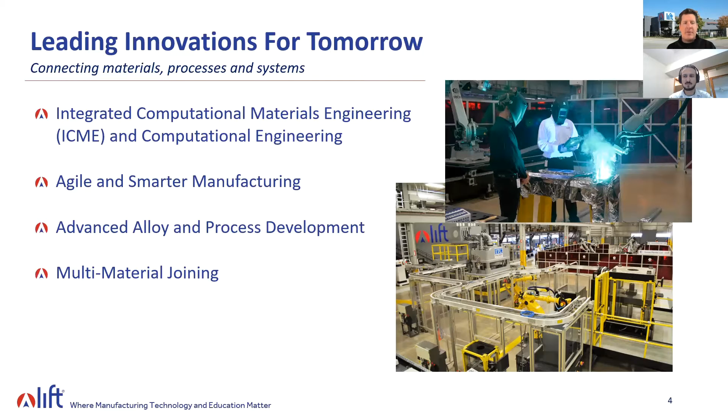On the technology side of the house, leading innovations for tomorrow, again, it's about connecting materials, processes, and systems. You can see our four main pillars of technology that we're working on, all the way from integrated computational materials engineering, the digital side of things, to agile, smarter manufacturing, advanced alloy process development, multi-material joining. As we're developing these advanced alloys and new processes, how are we going to join all of these things together?

A little bit deeper into each of those pillars of technology. I won't quiz you on these, but it shows you the depth and the breadth that we have, not only in our in-house facility in the Corktown neighborhood of Detroit, but around the country with our members and folks like MAHLE. So again, you can learn a little bit more about these on our website, or certainly reach out to us with any questions.

On the talent side of the house, learning innovations for tomorrow. Again, it's still about innovation, but new learning tools, pathways, and venues. We kicked that off with our Ignite Mastering Manufacturing curriculum, which is a 3-year high school curriculum available around the country. We do teach it at our Corktown facility here in Detroit, a 3-year program for high school students really to open their eyes to advanced manufacturing. We host that at the LIFT Learning Lab, but the curriculum is available in about 11 states now.

But the Learning Lab is an immersive lab where students get to come in, and while they're learning about advanced manufacturing, they get to look out the windows and see our technicians, see our ecosystem hard at work, developing some of the new technologies that we just talked about earlier.

And we also offer world-class certification programs on our own at LIFT, but also through a program we call Operation Next, which was developed as a military-focused program to help our men and women in the military before they separate from the service, up to 6 months before they leave, to give them the opportunity to earn the credentials in some of the most in-demand jobs. These are nationally portable, industry-recognized credentials.

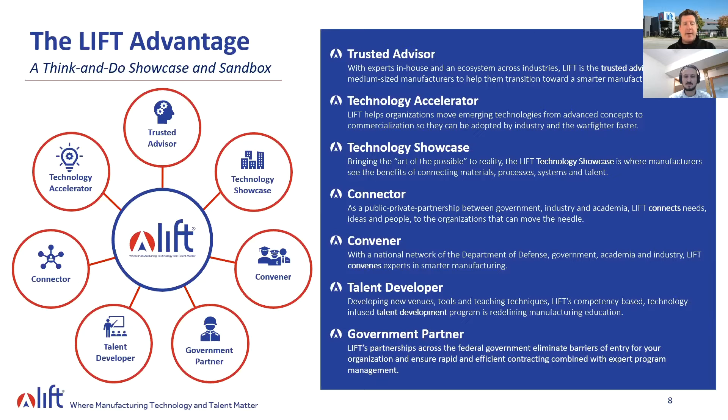In the meantime, you wanted to hear from MAHLE today, so I will hand the presentation over to Ciro, and I'm going to stop sharing my screen so he can share his. Ciro, the show is yours. Thank you very much, Joe. So thanks, LIFT, for having us in that community. We're happy to have joined and to be part of LIFT, and it's an honor to be here and to be in that group. Yeah, thank you.

First of all, maybe a quick introduction. My name is Ciro Vieira. I've been working with MAHLE for the last 17 years with assignments in Brazil, in Germany, and now since 2016 I'm here in the US, and I'm heading the sales and business development function of our MAHLE Industrial Thermal Systems division. So we'll be going through a little bit of MAHLE, and what industrial thermal systems means within the whole MAHLE. So better to go straight to the presentation, and then I can clarify a little bit of the organization here. Okay. Let me move on here.

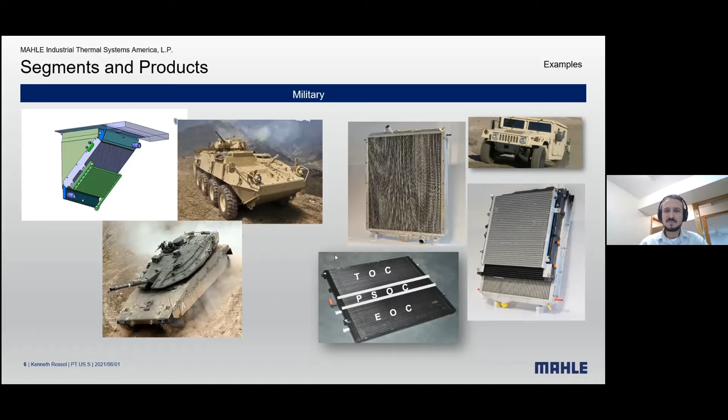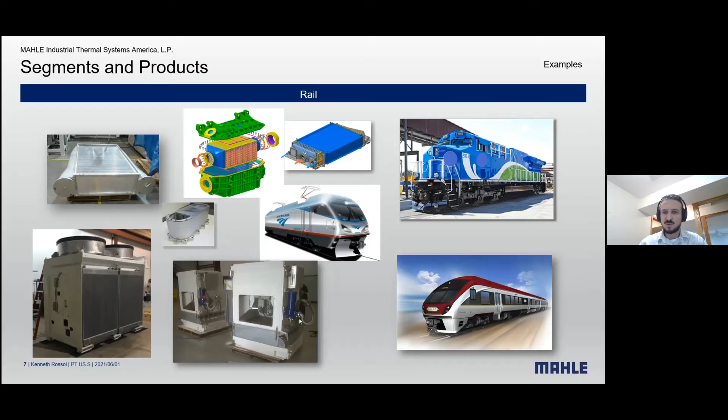Moving on, here is a little bit of what we do for the rail market. These are some examples of charger coolers, three different designs for rail applications, and those are cooling towers for those massive public transportation locomotives. These are really big units, weighing more than I think 7,000 or 8,000 pounds, and probably some 8 feet high. That's used to cool a 4,000 horsepower plus engine on a passenger locomotive. Those are cooling towers for electric driven locomotives as well, also produced here in our Belmont facility.

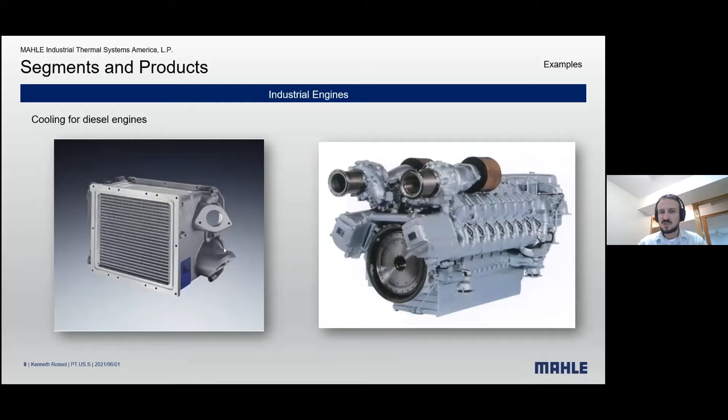So if it goes to lighter applications such as passenger cars, you have a tube and fin technology, which, yeah, I'll probably explain tube and fin first and then get back to bar and plate. It's easier like that. So you have a pre-formed and welded tube which gets inserted into a header, where the fluid is going to be flowing through those tanks and through the tubes here in the core, and then the system is going to be rejecting heat, in this case to the air, through the air side fins here, right?

This kind of system is much lighter, right? And usually suitable for smaller and less demanding applications. Although by smaller, I even include some really heavy agriculture machinery, construction machinery, and even some military applications could use this kind of system as well. But that's what we call a lighter application within our universe of markets and applications we serve.

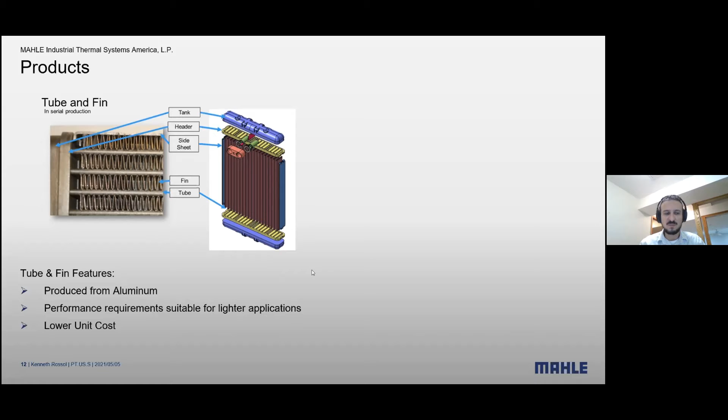our customers, right? So it has a downside, which is usually when you're developing a brand new cooler heat exchanger out of this technology, you tend to have slightly higher investments in the equipment and tooling needed to produce one specific system, right? So that's why it's suitable not only for lighter and smaller applications, but we also tend to prefer it for higher volume applications.

Okay. So coming back to the bar and plate construction, here you do not have a preformed tube to insert into a header as we've seen on the other applications. They can look very similar from the outside, but from a construction standpoint, they are completely different, right? So here you don't have pre-welded tubes. You have plates, aluminum plates. You have bars, right? And you start stacking them together, so that you have your fins, a plate, some other profiles here, an aluminum plate on the bottom, an aluminum plate on the top of that.

And that would be all compressed and then brazed together in our brazing furnaces, where there will be a bonding of the material here. And therefore the tube is going to be formed after the assembly and braze process, and not pre-manufactured and just assembled into a unit, right? So these are aluminum coolers as well, right? So no significant difference in material here.

And they are usually much more resistant for the sake of withstanding high operating pressures or high thermal stresses while delivering equivalent thermal performance, right? So we have a lot of flexibility in doing those designs, as opposed to the tube and fin. So we have more flexibility here, and we have less investment in tooling and equipment when it comes to developing a new customized solution, right?

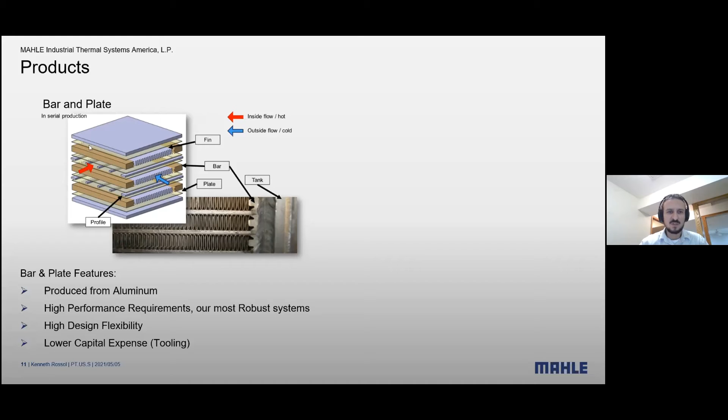And as well, due to the relatively lower volumes of military programs, that makes it a choice in economical terms due to the lower investment compared to other systems. Okay, so we covered tube and fin already. So, round tube production. Here we are switching from aluminum to stainless steel. Okay, and there is a reason for that.

The round tube production is usually applied to much heavier applications, for big industrial engines and as well for exhaust gas recirculation cooling systems, right? The temperatures EGR systems face are much higher than a regular oil cooler or coolant cooler for a vehicle radiator, right? Therefore, stainless steel is the option here. Aluminum wouldn't be the option, as aluminum would not withstand the temperatures and the requirements of such applications, right? But that is also a technology we have available here to add to any application which would have restrictions on what aluminum would be capable of.

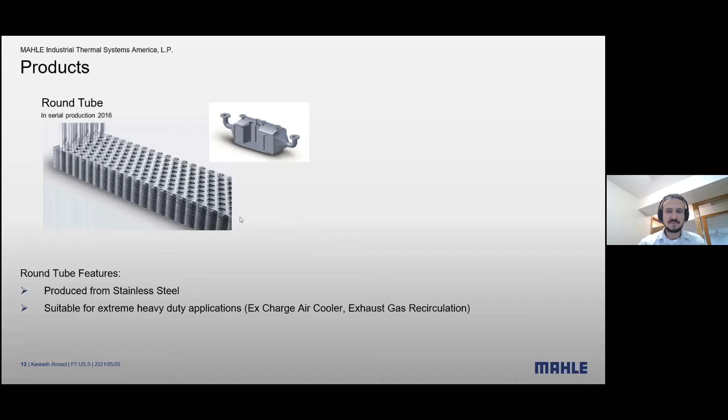A fourth technology to produce heat exchangers is what we call stack plate, and in this case, oil coolers. They can cover different fluids as well, so they can cool different fluids such as fuel. They can even be used for some air conditioning condensers in some cases. But stack plate is a construction technology which is different from what we saw a minute ago. They do not reject heat into the air; it is a fluid to fluid system instead, right?

So you have oil flowing through one of those circuits and coolant water flowing through the other circuit. You have intercalated plates, so usually one plate channel where you have oil flowing, the next coolant water, and so on, so that the oil heat is rejected into the water. Then the water flows through the coolant system of your vehicle, and that heat is finally rejected out to the air through the vehicle's radiator, right?

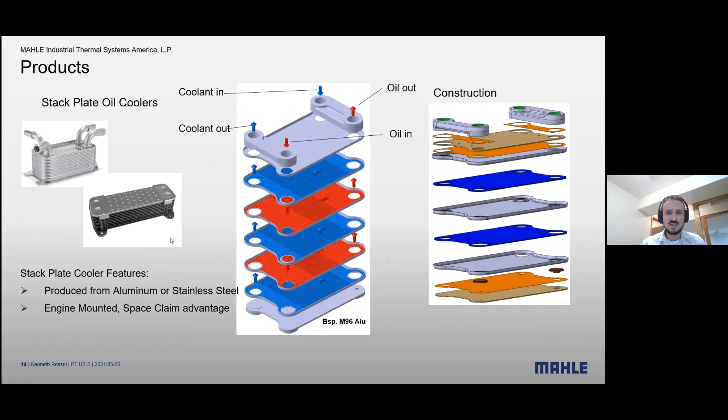We have designs for both aluminum and stainless steel. Depending on the application, we would select one or the other, aluminum being the first choice for the sake of cost. And there are some advantages in terms of space claim. Those are usually very small and compact units that can be mounted directly to the engine without any piping connection, if you're talking engine oil cooling. So those have a specific application and specific advantages as well.

I wanted to point out as well our capabilities with battery cooling. This is an example of a standalone battery cooling system. If you have an electric or electrified application, one of those units could be added to your vehicle as well. Most of the AC system is comprised here: your evaporator, your compressor, and condenser fans are all integrated in that standalone system.

And this is just a quick diagram of how a battery cooling thermal management system works. You have a battery. You need to get your battery operating at an ideal temperature, both for the sake of holding power longer and for the durability of the battery. If you have your battery running outside of its ideal temperature envelope, you definitely have a reduced lifetime of your battery, and we know how big of an issue that is.

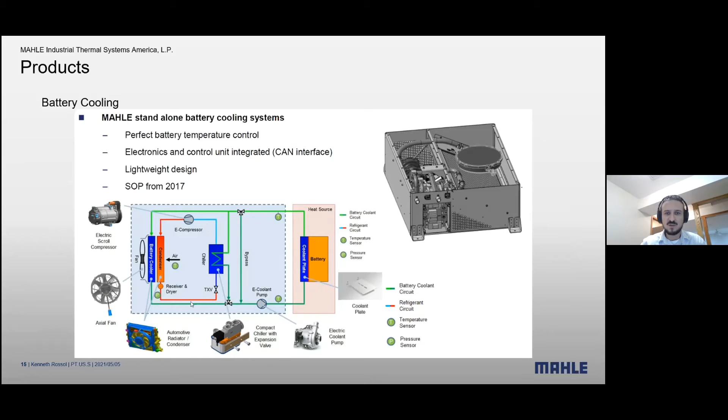Our system has a condenser and a battery cooling module, usually in front of the vehicle, with an expansion valve as well, which absorbs heat out of a chiller system, which then cools a fluid, which is finally what goes through the battery and the cooling plates, absorbing the heat rejected out of the battery. And that's a closed loop circuit. You have two loops, one for the refrigerant and one for the coolant, and both circuits are closed loop systems dedicated to the battery cooling.

Coming back to our team and our technology development capabilities. Here in the US, we have a team of 5 development engineers and designers, 4 process planners, 1 prototype technician, and we have the support of the big MAHLE. Although we are a niche application within the big MAHLE, focused on low volume, very specific applications,

we can count on the technology developed by the big automotive MAHLE. Different from other players in the market, which are only active in the off-highway segment, we can count on state-of-the-art technology developed by big MAHLE for automotive applications and then apply that to our own off-highway applications.

As I mentioned, the BISS simulation system is our thermal simulation software developed internally at MAHLE, constantly being fed back by actual testing results to make it even more precise. This is a diagram of a thermal simulation performed on a cooling system comprised, in this case, of at least 4 different heat exchangers.

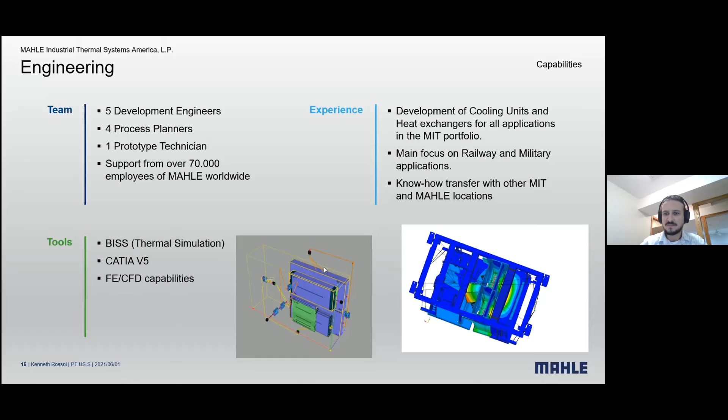Okay. For design, we use CATIA V5, and we are as well capable of doing finite element and CFD simulations. Okay. I think I spoke a little bit about the BISS thermal system simulation. So probably a couple of things I haven't mentioned yet.

So we are, of course, capable to use on every one of those coolers different fluids, right? So water and glycol mix, or 100% water, or oil, and different types of oil, or any other fluid which is going through the coolers, right? So we have functions for each one of them,

and as well we are capable to add the influence, not only, as I mentioned, of what influence one of our coolers is having towards another, but as well some influences that other systems in the vehicle can cause, right? For example, a grid or a bottleneck on airflow or any other restriction that can be there.

So when you mount the engine cooling system into the vehicle, as well as if there are other heat sources which should be adding heat, adding temperature to the cooling air compared to the ambient temperature. So are there other elements which are not within the cooling module which are adding heat to the air, so that air is reaching our cooling system in a temperature which is higher than ambient? All those external factors are as well able to be considered on our system simulation.

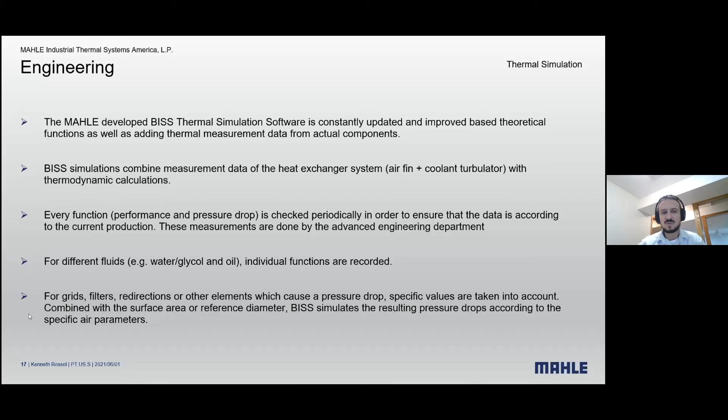So we can not only test our own equipment there, but we can definitely sell our services if anything else is being tested on those vehicles, even if we're talking about a vehicle with cooling systems or any other systems coming from a competitor, right? And by the way, our wind tunnel is as well ITAR certified, right? So there shouldn't be any issues. We have had vehicles tested under ITAR restrictions, and that's no issue for the wind tunnels in Troy as well.

On top of the wind tunnels, we have performance test benches where we test the standalone heat exchangers, right? So we have pressure and thermal cycle test benches. This is more for validation of durability, not directly performance. We can test fans and fan clutches as well. So corrosion chambers, vibration test benches, so shaker tables, basically, right? Acoustic test benches, and metallurgic analysis, right? So that's all in-house capabilities we have within MAHLE.

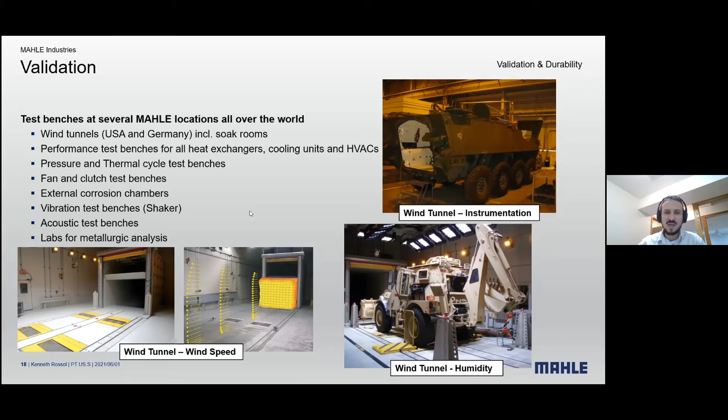Yeah. So that is performed in our plant 3, as I mentioned in one of the previous slides. So that's where we do all this service and remanufacturing work, as well as some final assembly and warehousing. So we do have cleaning capabilities, including ultrasonic cleaning, and we do have our own proprietary processes to repair and to test the coolers and make sure they're coming back leak-free and in operating condition to the field.

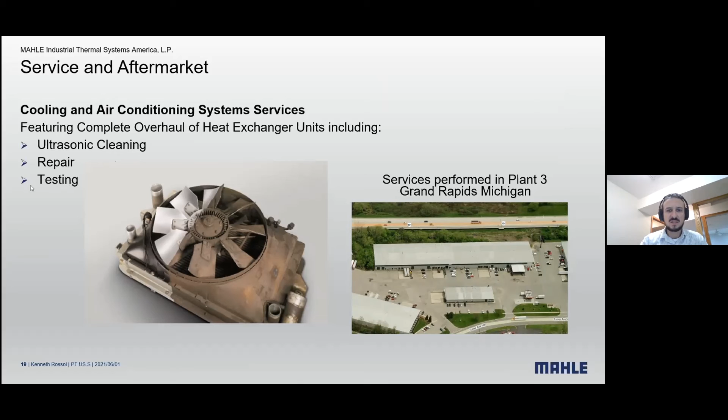Okay, a little bit of our facilities here. So this is our pressure washing booth, right? So whenever a cooler gets to our location, it's first pressure washed from the outside to get rid of all the dirt which is outside of the cooler, right? So once it's clean, it could either go straight to those chemical soak tanks, right, to break down any stubborn dirt or even some internal dirt which could be in those coolers. So they get chemically cleaned, and they get rinsed.

And then last but not least, ultrasonic cleaning is where we get rid of the remaining impurities on that cooler, right? So in some cases, we even flush the coolers from the inside, to clean them from the inside with a cleaning solution as well, right?

This is a picture of a cooler as we receive it, and that's how they return to our customers, right? So in most cases, to the uneducated eye, it's even difficult to differentiate a refurbished cooler from a brand new cooler out of our production, right? So the results are really, really positive here. And that refurbishment can be done, of course, at a fraction of a new cooler or heat exchanger cost.

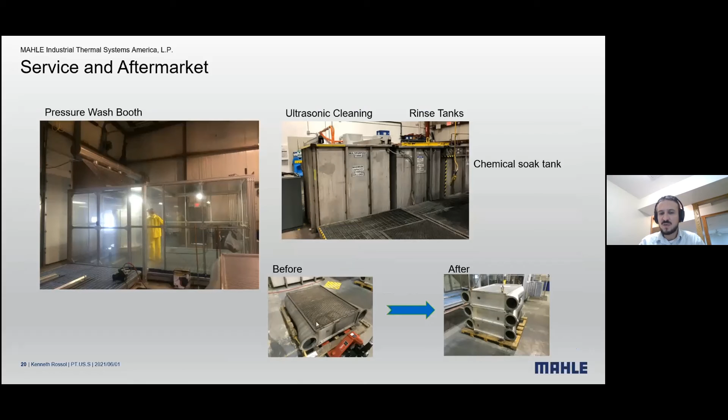So we can do that as well, reusing the tanks and some other components and replacing the internal core of a cooler, right? And we are capable to overhaul hydraulic systems and even some electric systems in some of our units. Yeah, and that concludes my presentation here.